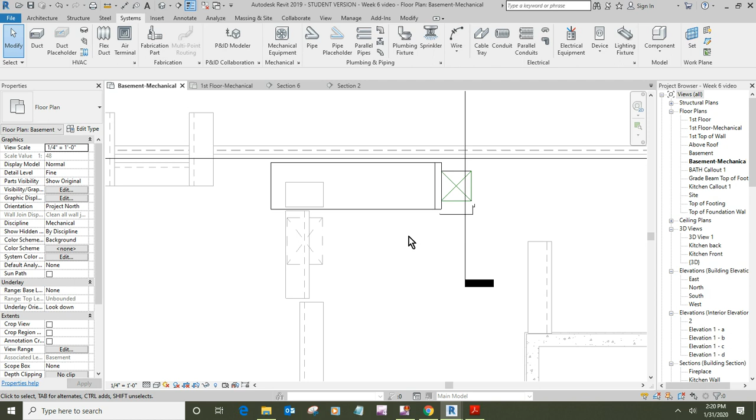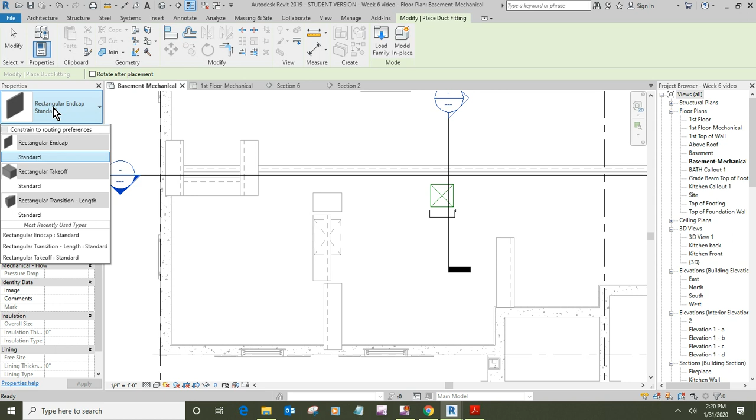Because that's what I had set up as my preferred takeoff, going from a smaller duct into a larger duct would work. So we're going to place a duct fitting - oh, there's my tag right there. I want to place a rectangular transition, and I'm going to just pop it in right here to start with.

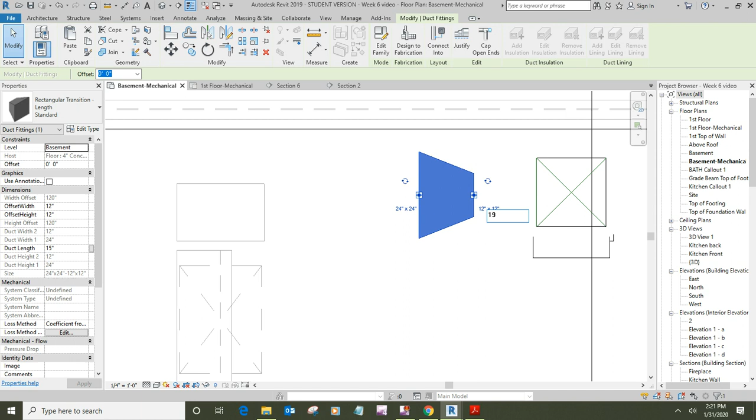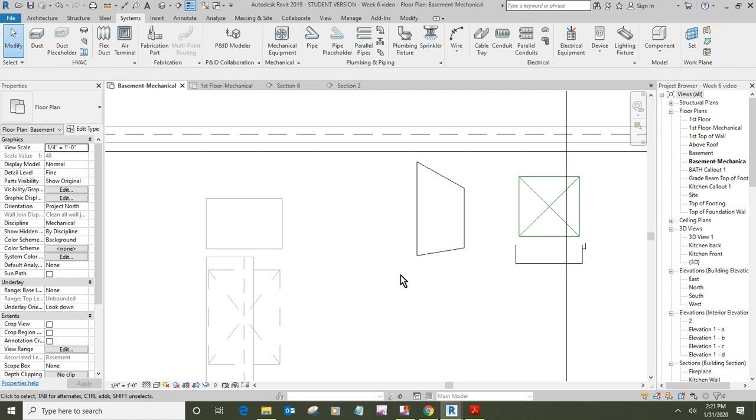Now we're going to play with our size. We want it to be on this side a 19 by 13, and on this side I want it to be a 30 by 8. Because when you're dealing with ductwork, you've got the cross-sectional area of the duct needs to be the same as it's going down, until you have other outlets going off to the rooms, and then it changes.

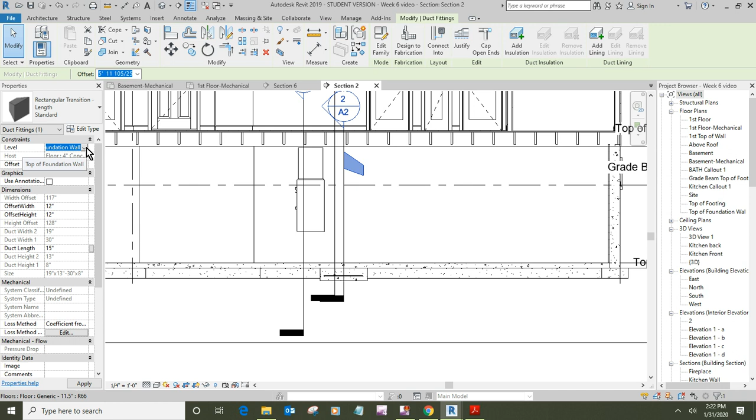Now we've got this in, and it jumped levels. I didn't set the levels. Top foundation wall, minus 5 inch. Well, that was weird. Really weird. Oh well, anyway, you can see it's kind of weird shaped.

We'll go back to this plan. So what we do is we play with the offsets on this thing. These are basically, it would be half to make it symmetrical. Okay, let me check my notes right here. So I want my offset width to be 15 inches.

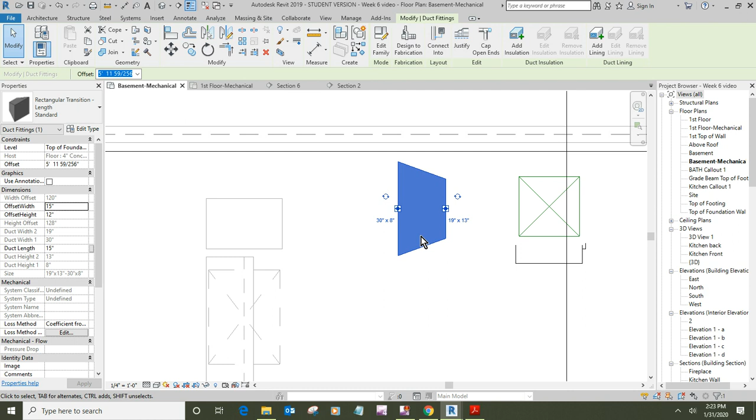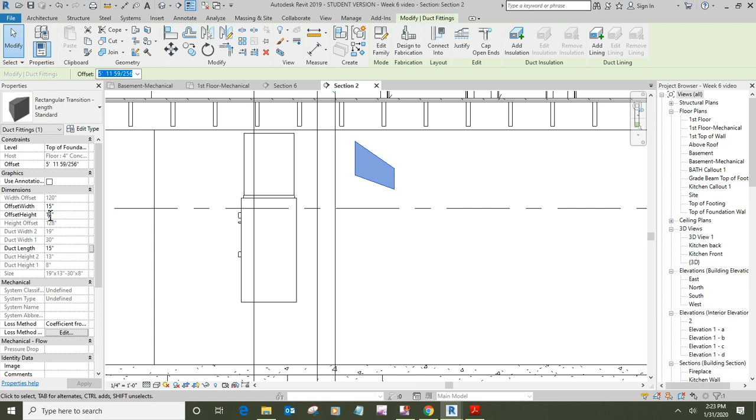You can see it centered it up symmetrically this way, left to right. If I look at it in section view here, it's still offset in a weird way. So in my case, because I want it to be flat on the top, I'm going to go 1.5 inches, and that will make it flat on the top.

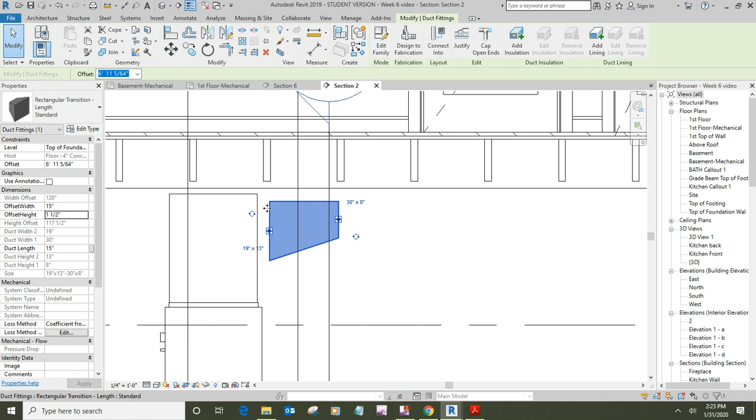And so now let's kind of move it over here a little closer. I'm going to leave it unattached right now. I do want it to be centered up though.

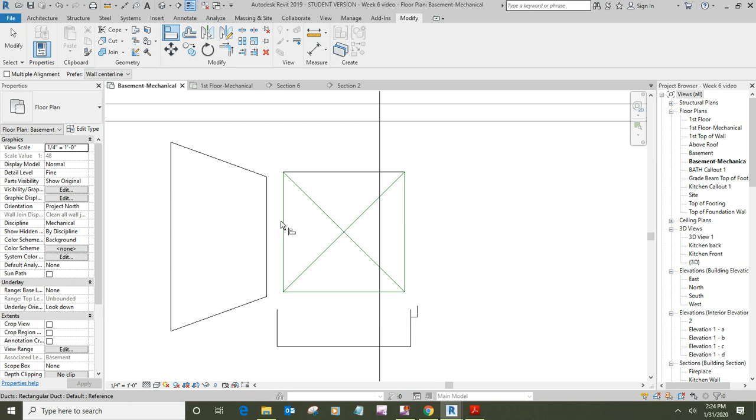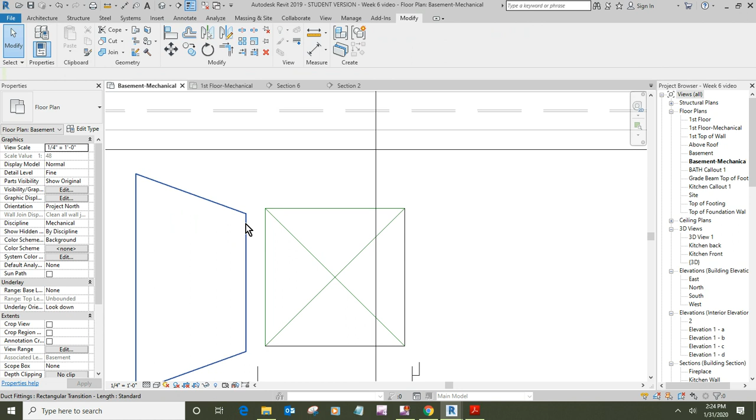Man, this thing don't want to pick nothing. No, I want the other section. Where's it at? Well, that didn't work right, did it? Oh, it jumped up.

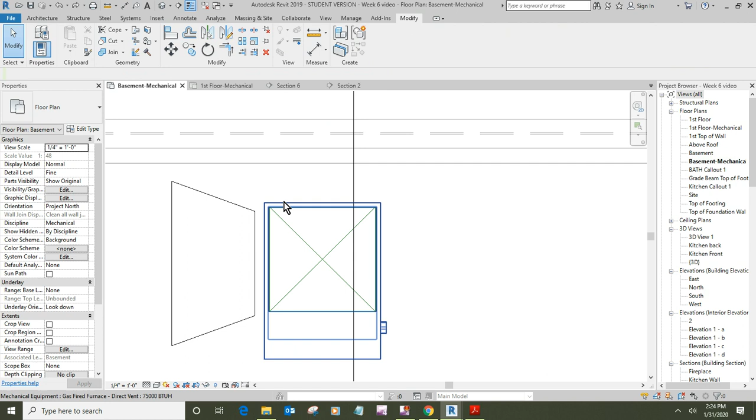Okay, let's put a piece of duct in first. This thing can be kind of frustrating. All right, so you can tell I use it a lot, can't you? I'm gonna go with my duct 30 by 8 minus 3 offset, that's what we were talking about, and so I'm gonna go about 8 feet long.

And I'm gonna click, and now I want to change my duct size to a 20 by 8, and you see it changed automatically. And I'm going to go down about another 8 feet or so. We'll have to play with it.

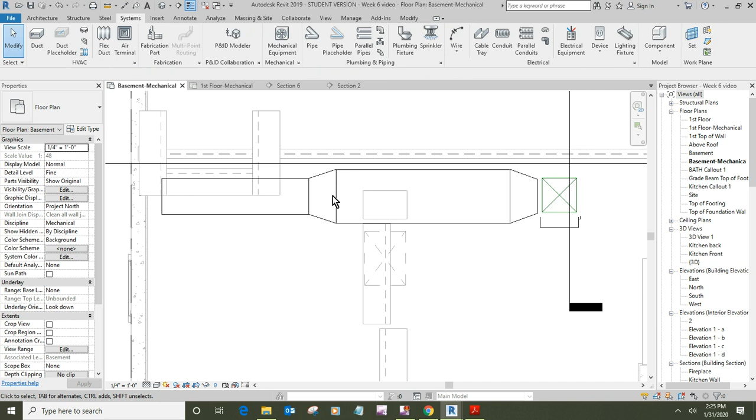Okay, and so now you can see it put my transition in there for me. Now we still have to line this thing up.

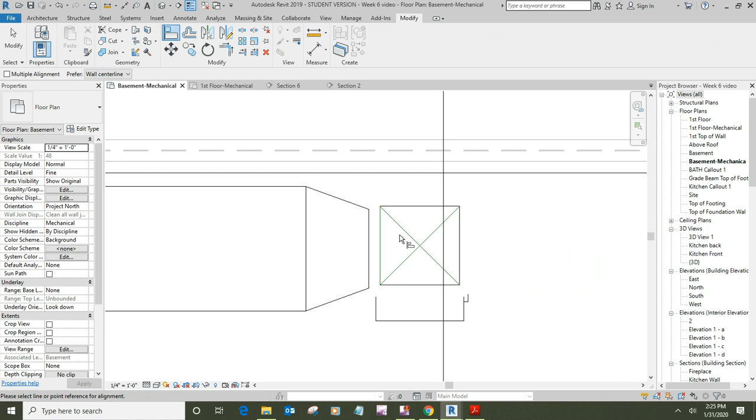It is not picking up with my piece of ductwork there, which is weird. It worked so easy a while ago, you know, when I was doing it. There we go, okay.

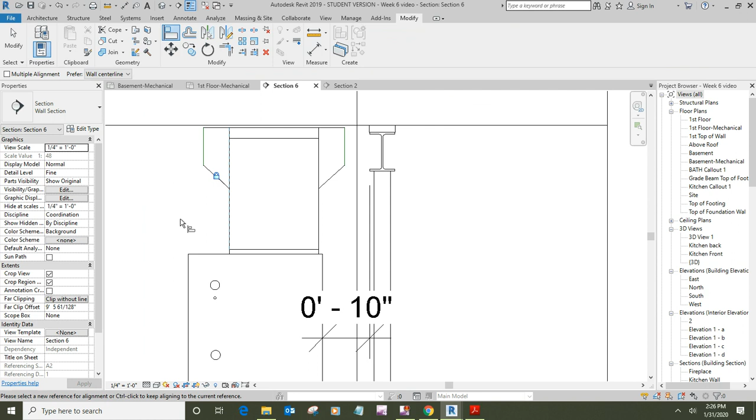All right, now before I attach this thing together, because this is at... I need to hide that floor, the generic floor. I'm at time wise, I'm at 17 minutes. Okay, let me pause this video and then I'll come back with the next one.

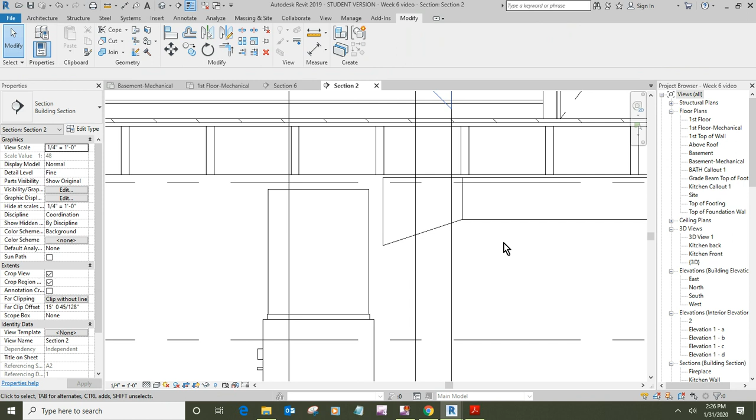Okay, we got the duct run down through the side of the house. So I've got it, and it's at my offset that I want. I want it at -3 inches from top of foundation level, that's to the center of the duct here, okay? My reasoning for that is that puts me about half an inch below the floor joist. And if we use solid ductwork, they'll wrap insulation around it, and that'll take up a little bit of extra space there. So that's why I did that.

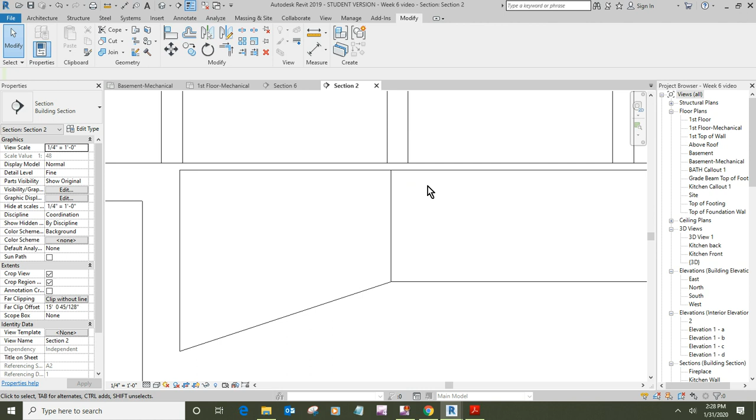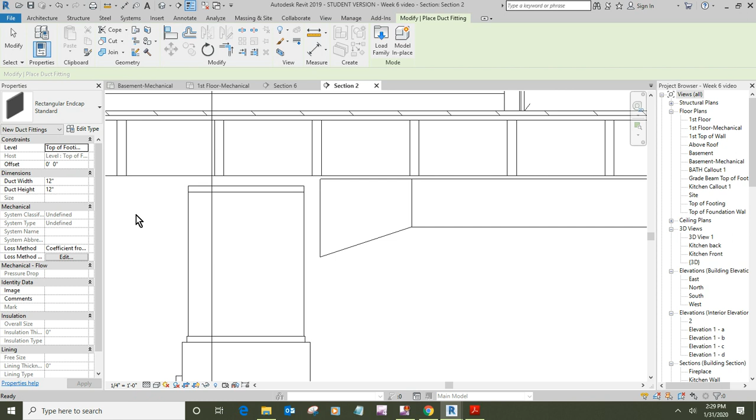So now what I want to do with this one is I want to add a cap to the top of it, and then I'll move it up. So I'm going to go Systems, Fittings, Standard End Cap. And usually these things will automatically resize themselves. Okay, so put it on, made it a 19 by 19 over that duct.

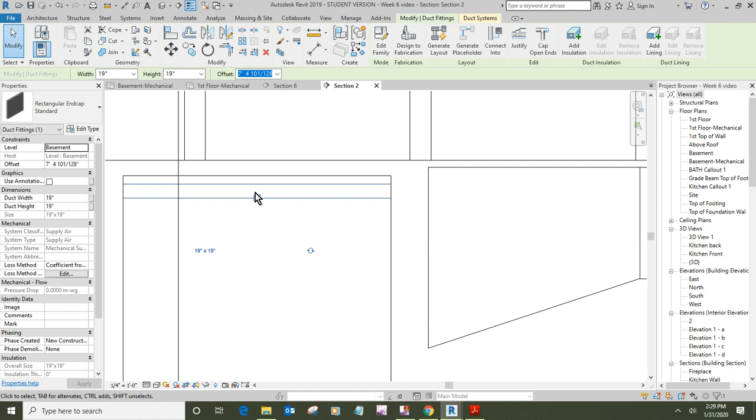All right, and so now I want to move this whole thing up, except for that didn't move up with it. Okay, basically I want to... well, this is kind of a weird situation.

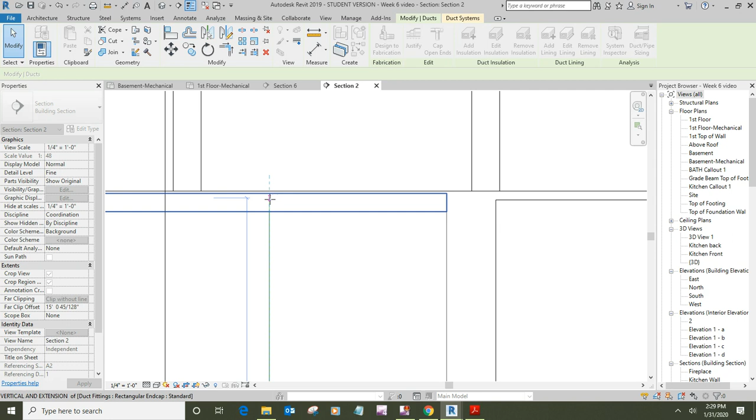Tell you what, I want, because the cap takes over some extra space, we're going to do an alignment, top of duct, and then we're going to move that cap up to there. And even though it's intersecting in with that joist right there, these caps don't take that much room and they'll fit right down. So now we'll take this one.

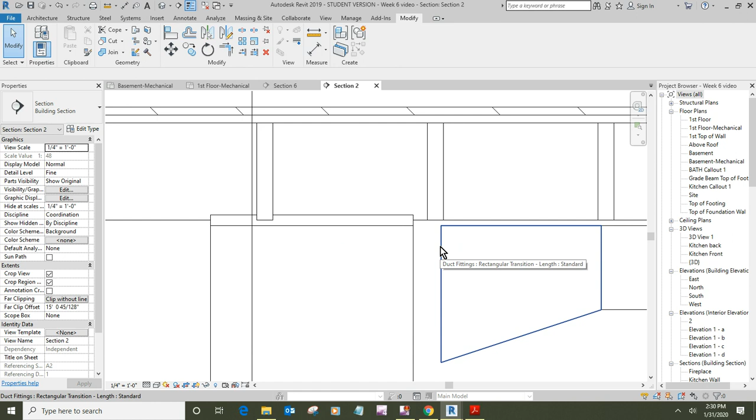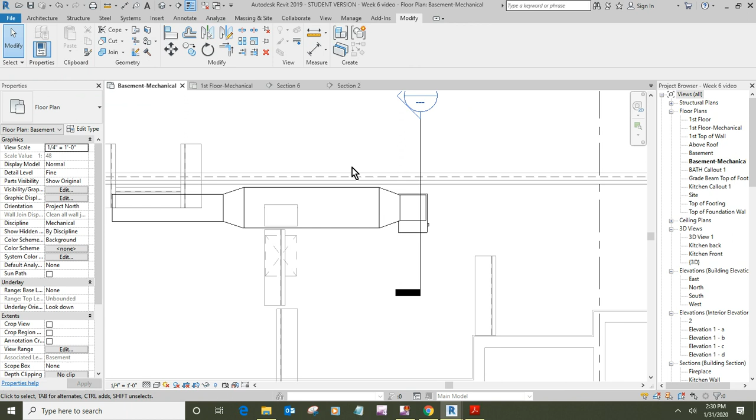It's not what I wanted, so we'll go with an alignment also on it. Probably not the best way to do things from a mechanical contractor's point of view. Okay, so we got our furnace, our vertical supply duct transition, 30 by 8, a transition, a 20 by 8, and that looks about right there. So we'll put an end cap on that.

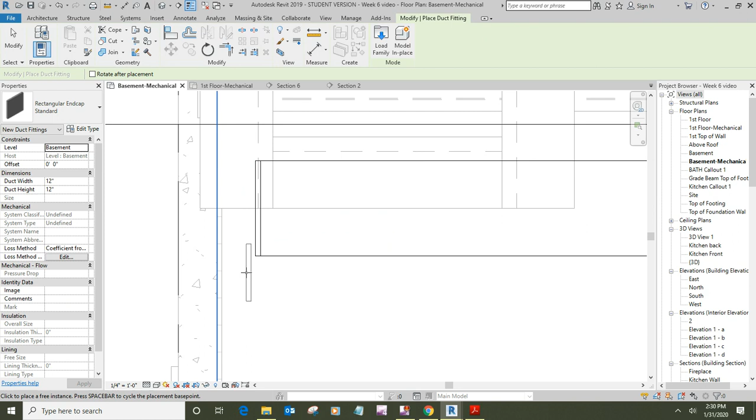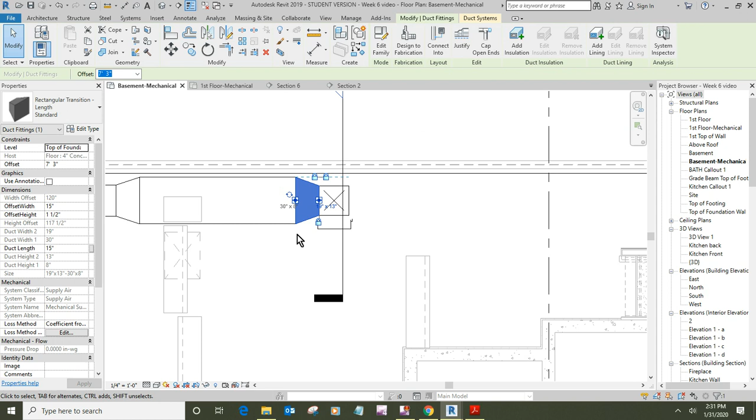Okay, now we'll do the same thing coming down the right side. And honestly, I haven't tried mirroring the duct. I know I did mirror the transition. The duct is easy enough to draw once you've got it in. So I'm going to mirror that, and I'm going to choose the center of the duct as my mirror point.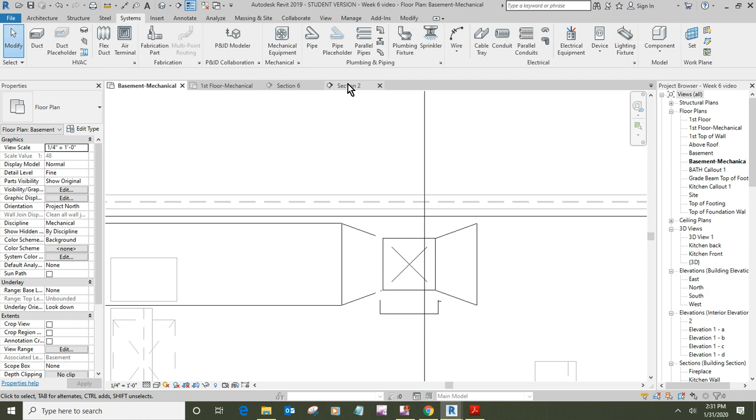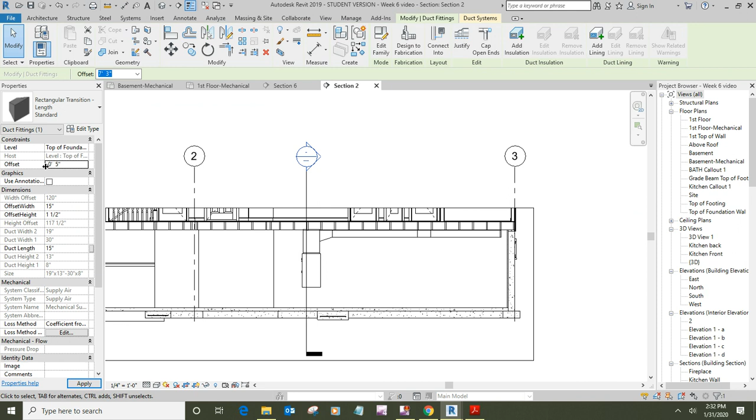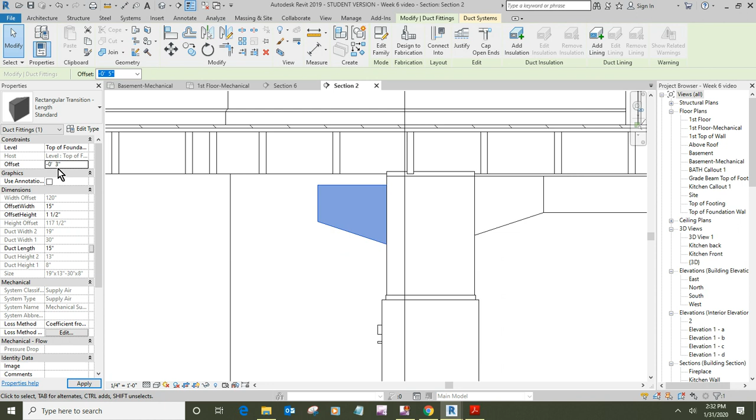Oh, there it is. Oh, it's at top of foundation level 7'3". Oh, because that one was top of foundation 7'3". Okay, that looks right, okay.

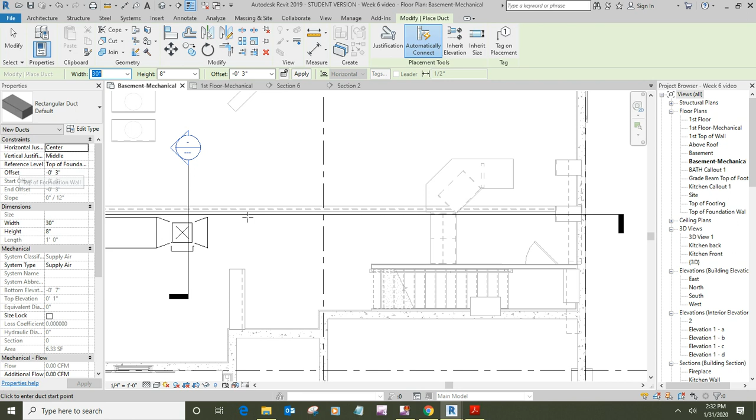And so now coming out of this side, I'm going to do another duct. We'll go back to our 30 by 8 by 3 top of foundation wall, and then we can just pick the center of that transition. And we're going to come down, look at my notes, about 12 feet, so we'll go about 12 feet.

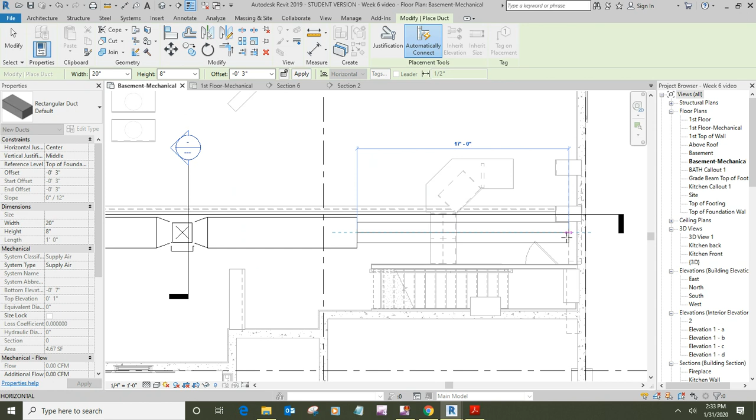And now let's change back over to a 20 by 8 and go another 16 feet. This one needs to go, geez, almost to the wall there, and we'll stop it just about right there. Okay.

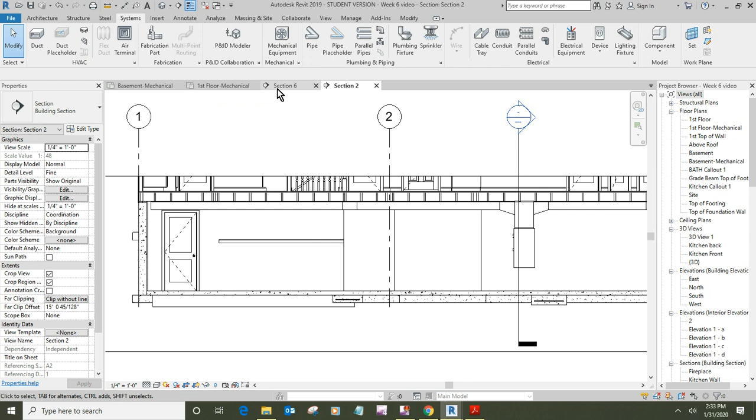So let's go back to our section and take a look at that. That looks good, running all the way down through there. Okay, so that's got our major ductwork in. Of course, you're going to want to put a cap on the end of that. And then we'll come back in my next video and we'll start doing the supply vents up into the room and the ductwork that comes off for them.